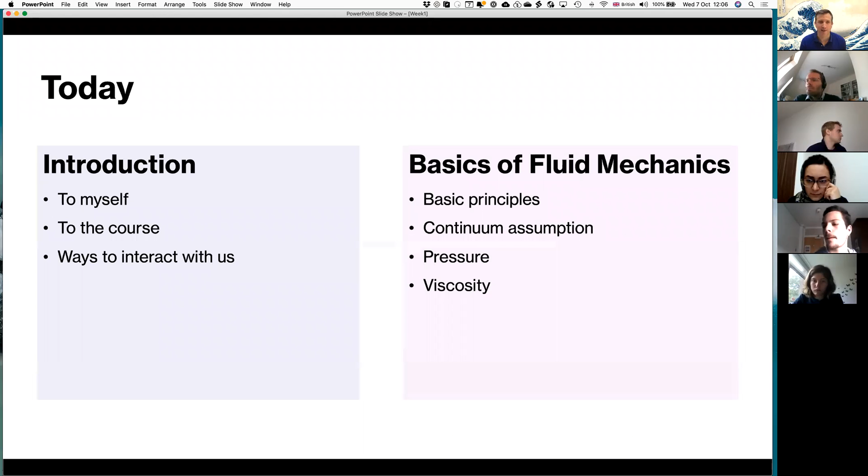Depending on how we're going, we might have a short break, or there'll be a short exercise for you to do, where we'll start to discuss some of the ideas behind the basics of fluid mechanics, in particular the continuum assumption, and introduce some of the main thermodynamic quantities of interest. Then I'll set you off with a couple of questions before Friday's session.

Right, so with the introduction - my research. Believe it or not, I was a student in Manchester a long time ago. I did the aerospace course, and I think I started with a very strong interest in aerospace, but it was more a technical interest. As the course developed, I realized that my interest lay in fluid mechanics rather than any one particular technology.

That's because fluid mechanics is such a powerful topic that it covers so many things in our everyday life. After I did my studies, I realized that my main interest was in this area, and I explored the possibility to investigate other applications. The thing I really love about fluid mechanics is that with one set of equations, with one understanding, we can contribute to so many different areas of science and technology.

I started in aircraft, did a number of research projects looking at trying to reduce the drag of, in particular, commercial transport. But then I moved to automotive and did some projects with Jaguar Land Rover, and also some motorsports projects, where the challenge was very similar - you're looking to understand the aerodynamics around complex shapes. The speed's a little different, but the equations more or less were the same.

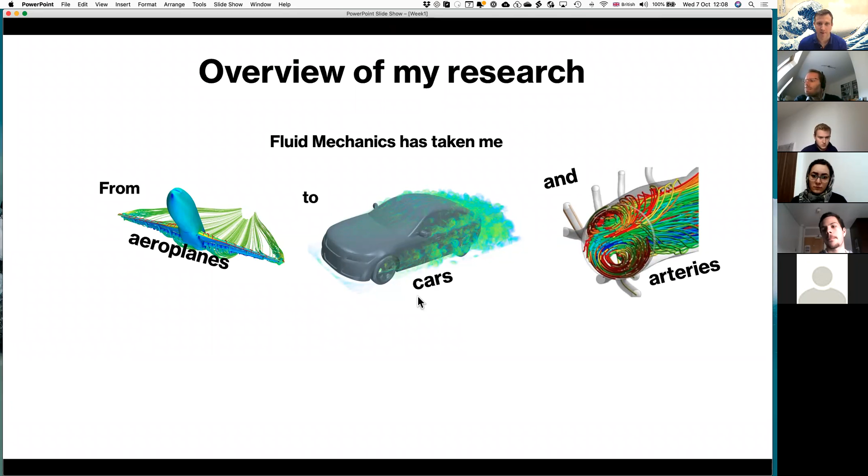I think the other thing that's really great about fluid mechanics is that because it's involved in so much of the outside world, it's just there in industry. Throughout my work, I've been involved in a lot of projects with industry, ranging from energy to tech sectors, as well as aerospace and automotive. It's been a great experience in terms of how versatile the equations are. I'll talk a little more about some of these things.

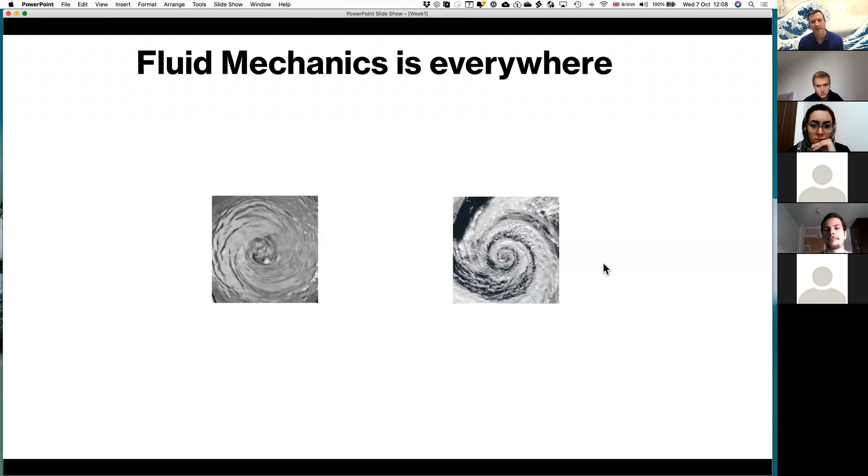Fluid mechanics is everywhere, and to convince you, I've got two pictures here - this is really the idea behind what we're going to drive at in this module. Once you understand the main equations, you can see patterns and shapes that are essentially reproduced all the way throughout our world. In this example, you've got a vortex system which is essentially identical regardless of the scale.

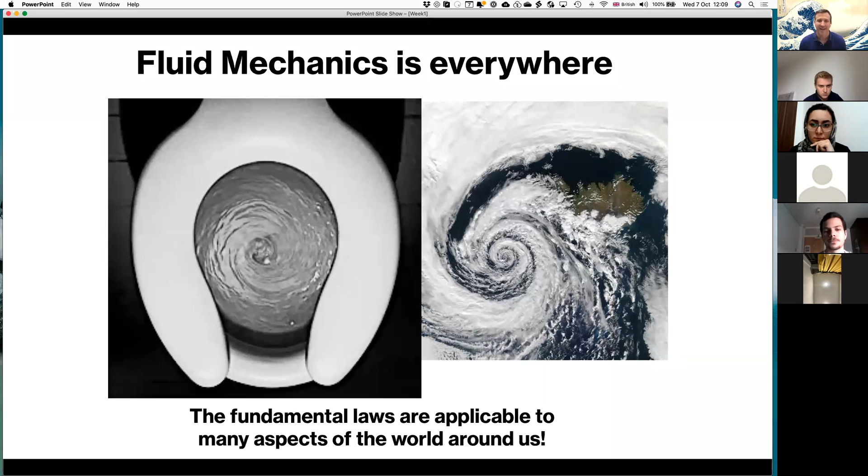We're going to start introducing some of the concepts behind the fundamental laws, which allow you to non-dimensionalize the observations and understandings, so that you can study the flow in a toilet, in a weather system, and understand them directly using the same concepts.

Fluid mechanics is indeed everywhere, but I think what really brought me into it was turbulence. This is a video that I find fascinating. I'm sure you've all heard of turbulence, but you probably haven't all really appreciated the intricacy and detail that's happening in a turbulent flow. This video is a high performance computer simulation of exactly what's going on in a turbulent boundary layer.

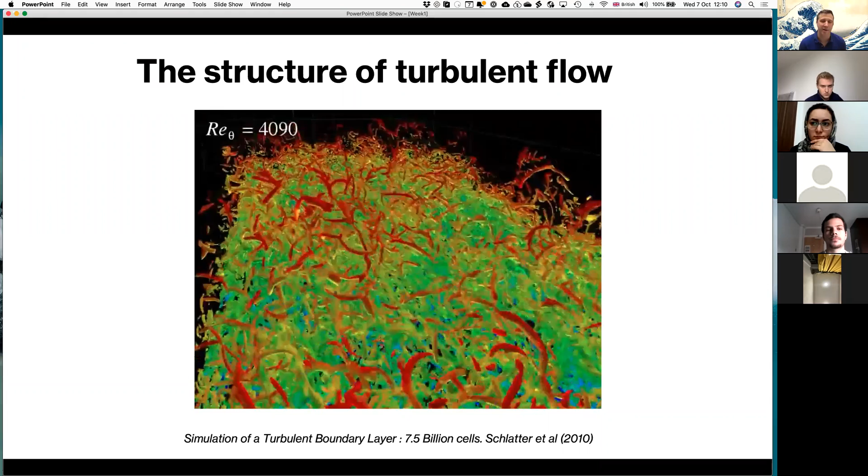At the time it was published, it was amongst the most detailed, most ambitious simulations ever attempted. As you go into the video, you see the flow become more chaotic as you go further down the boundary layer. The flow becomes more turbulent, and the boundary layer becomes thicker. What's really striking is the intricate detail of the structure of the turbulence.

This was run on one of the largest supercomputers in the world. It took up the entire facility for several weeks, and was seen as a fundamental science investigation to really understand in detail a turbulent boundary layer. But to put it into context, this incredible, amazing feat of computational fluid dynamics, as it's known, in a practical world is quite limited.

So really the beauty of fluid mechanics, from my point of view, is the intricacy and the multi-scale that it operates on.

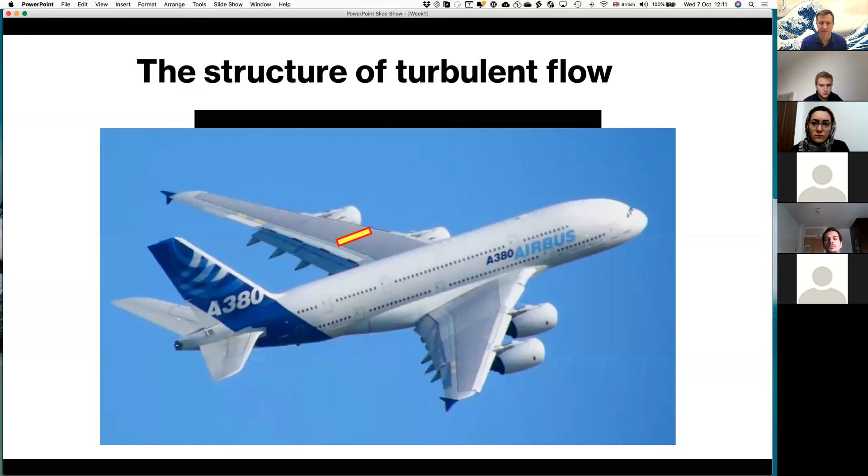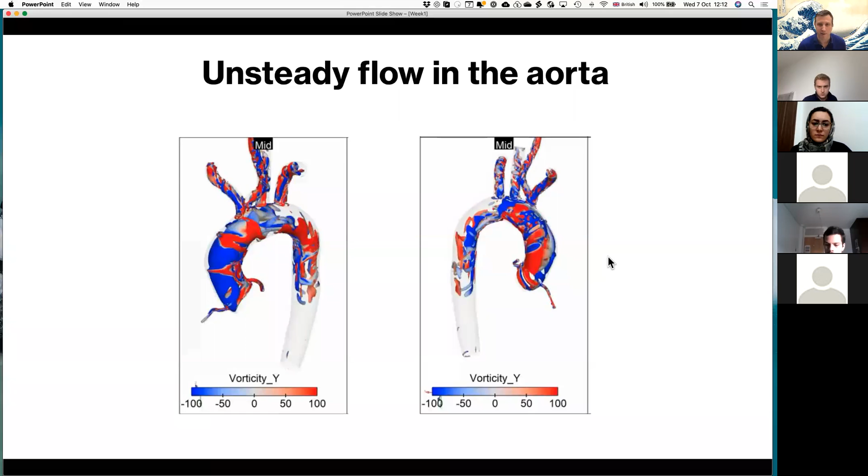And it's not just something limited to high Reynolds number. It's all around us, and potentially because it's invisible most of the time, we don't fully appreciate what's happening.

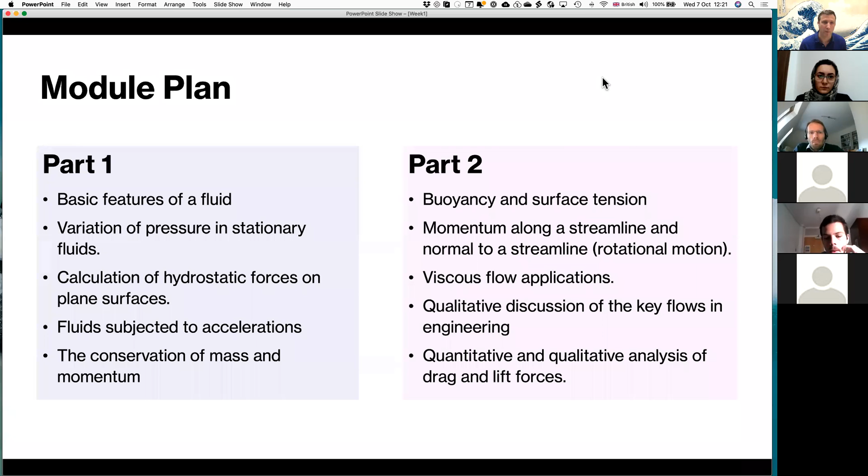So I'll finish part one by talking about the conservation of mass and momentum, two of the principal building blocks of how we use fluid mechanics. Then Professor Rogers will start part two, picking up on some of the things I've started, beginning with some of his personal interests and research in buoyancy and surface tension, then building on the application of the momentum equations and various strong approximations used to make them practical for a range of complex applications.

Broadly, from a synopsis of the unit specification, there are four aims of the course. The first is to make sure you understand how important fluid mechanics is - our goal is to pass on some enthusiasm for its significance and relevance to engineering. We also want to introduce, or solidify, your understanding of what a continuum mechanics approach is and how it differs from other methods.

We'll start to put all of the concepts together in a way you potentially haven't seen before. Many of you will have come across equations like the Bernoulli equation, and we'll probably introduce the Navier-Stokes equations, but perhaps not seen how they connect together. This is really what we're driving at - to show it's not a collection of disparate theories and laws, but that they're all connected, and with a proper understanding of how to go from one assumption to another, you can really leverage the power of fluid mechanics.

And so, introducing the main equations as well.

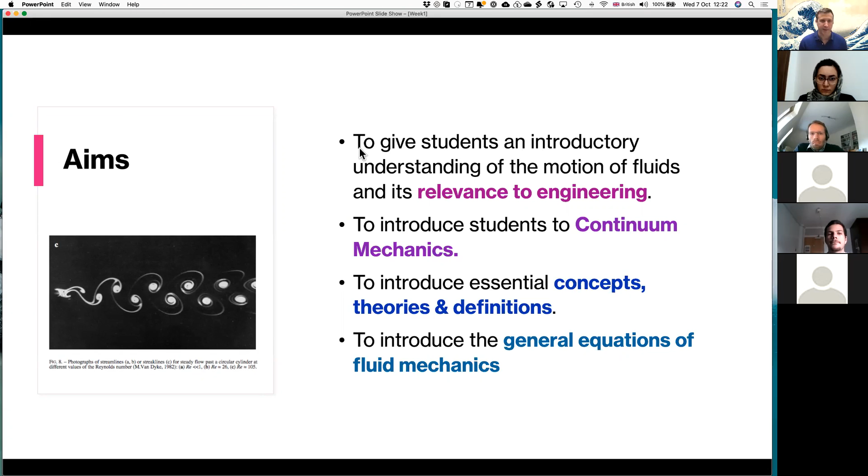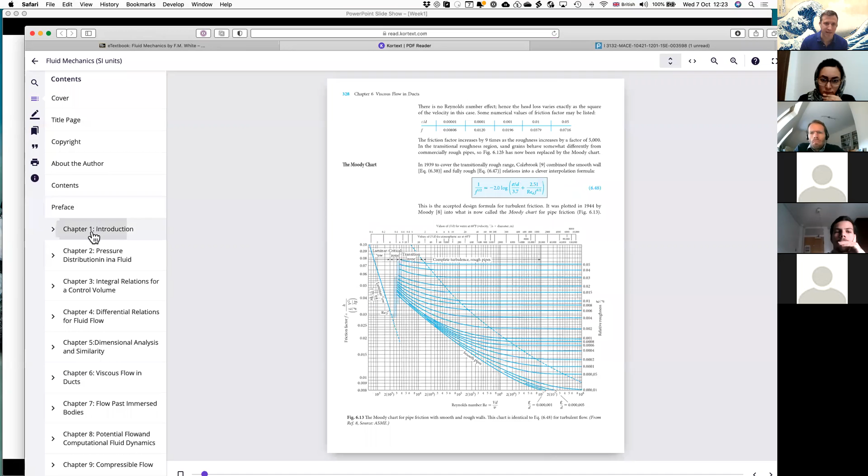This is the book we're using, available on Blackboard. I've got Blackboard loaded up here so you can all go to the page and access it via the Kortext website, which is a nice way to access an ebook - you can add annotations and notes that will stay with you throughout your degree, and quickly jump to chapters and navigate the book. As I go through, I'll give you some pre-reading each week.

We'll ask that you familiarize yourselves with those sections. Some of these will vary in complexity - this week there's quite a lot of pre-reading, but most of it is at an introductory level, and I'm sure you'll be familiar with some of it. As we go through, the amount of pre-reading will vary, and sometimes there'll be videos as well to help you understand some of the concepts.

In general, we won't go much beyond chapters 1 to 3. Someone already asked if you have to read the whole book - you won't need to for this course, though of course you can if you want. Our module content will focus on the first three chapters.

In terms of assessment, I've gone through that already. There's the quiz - I wanted to show it to you. Each week you'll have a chance to do a quiz, which is just basic multiple choice, with around 20 questions each time. You'll be able to answer the questions and get feedback on why your answers are correct or not. It's asking me to answer all of them now, so I won't do that.

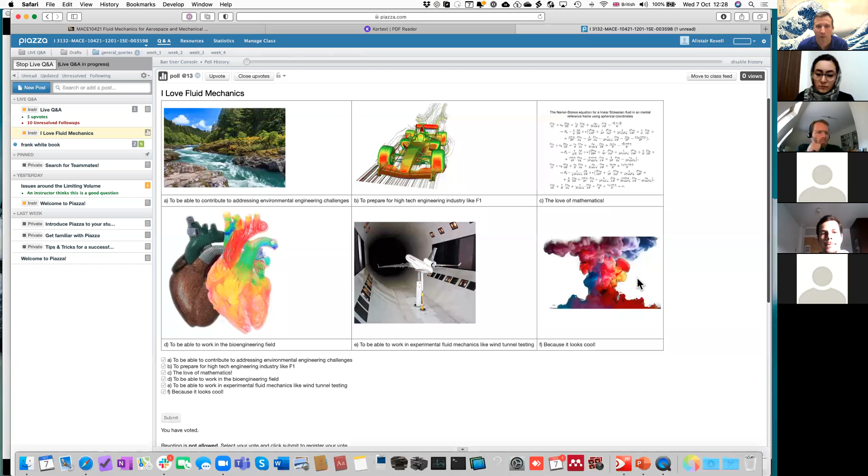And this one, I love fluid mechanics - why do I love it? Well, there's all sorts of reasons, and I've read them all through, and I'm not embarrassed to admit it's all of those reasons. We have some emerging answers: to prepare for high-tech engineering industries like Formula 1, that's interesting to hear. But also the environmental challenge as well, that's cool. And because it looks cool, right - that, to be honest, is a big factor for me. I really like the artistic side of it. Something that isn't picking up as much interest as I thought is D, the bioengineering. I'm actually surprised the love of mathematics is doing better than bioengineering. Okay, fair enough, that's some budding mathematicians with us. Okay, I'll leave that there.

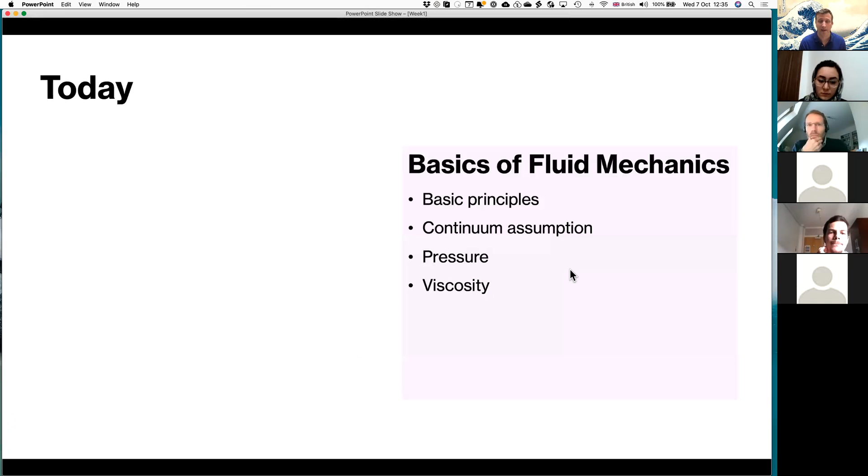I think everyone should have come back by now. So we're going to very quickly start with some of the main concepts of fluid mechanics, just to introduce you and pick out some of the important ones. Just to emphasize, we do rely on you to look at the content. There's quite a lot in this first week, there'll be less in future weeks. If you have any questions about it, just let us know.

As you will no doubt have seen, because this appears probably on the 3rd page, we are starting to classify fluids and solids and liquids as things that are essentially differentiated by their resistance to a force. That seems fairly straightforward. If you apply a force to a solid, it can resist it with a static deflection. In contrast, if you apply a force to a fluid, it will continuously move, and the only way it can resist this force is if you provide it with some external pressure, some kind of walls around the side. Without that, it will continuously fail, continuously move around and deform under the application of a force.

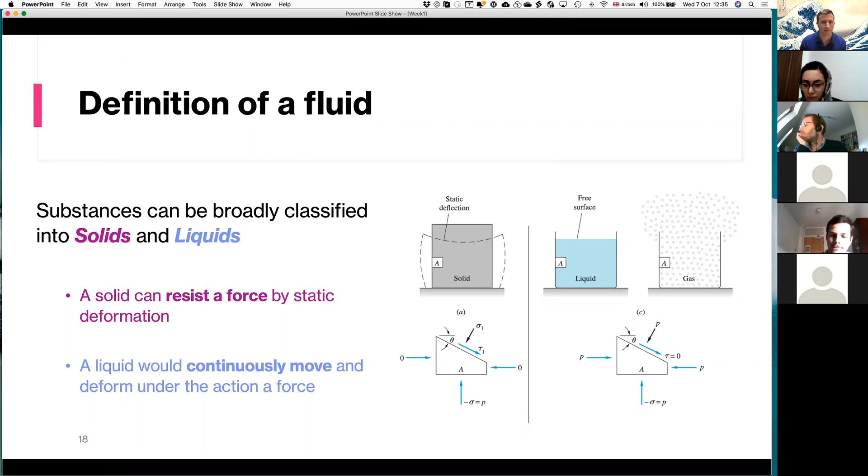And to demonstrate this, let's start a discussion on Piazza as to what is going on here. I'm just going to see if I can do this - new post... water, not water.

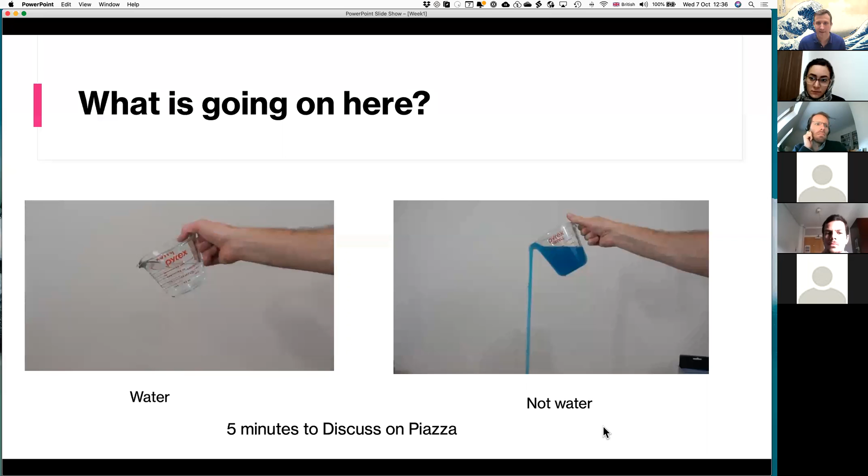Okay, so what is going on here? I'm going to play the video, and I'll give you a few minutes to put some comments into the box to see if you can explain this video I'm going to show you now. So you've got here a jug with some water in it, and here a jug which is not water. If you look closely, having just said it's fairly easy to define a fluid, something very strange is happening in the one on the right. The jug of water comes out in a very predictable way when you pour it, the jug of not water doesn't.

I'll leave that with you and let's see what people are starting to come up with for answers here. Laminar flow - well, they're both at low velocity, so it's not necessarily to do with laminar flow, they're probably both flowing in a laminar way. It's a polymer, this is interesting - so what is it about it being a polymer? High viscosity, yeah that's true. High surface tension in the not-water. I'm not going to tell you exactly what the substance is, I'll post that later, but it's definitely not water.

Just a little bit comes over the edge, and suddenly, bang, it all comes out. Weird.

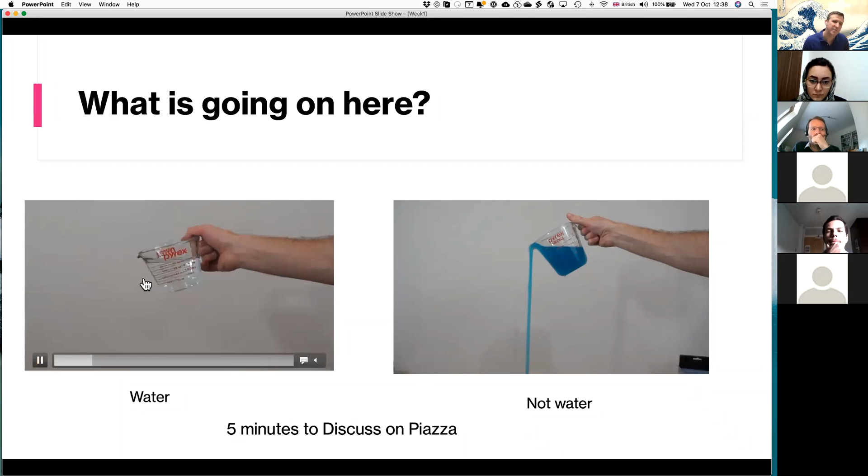Long chain molecule, that's it, well done. So essentially, it's a long chain molecule polymer. What's happening at a molecular level, as a little bit of the flow goes over the edge here, it's able to pull the rest of the fluid due to the fact that there are long chain polymers connected to the rest of the mass of the fluid. In contrast, the water molecules are small enough that they're able to essentially act in isolation from the rest of the fluid. This perspective is really important as we start to consider a fluid as a continuum. A fluid at a molecular level is nothing more than a group of particles that have a position and a velocity.

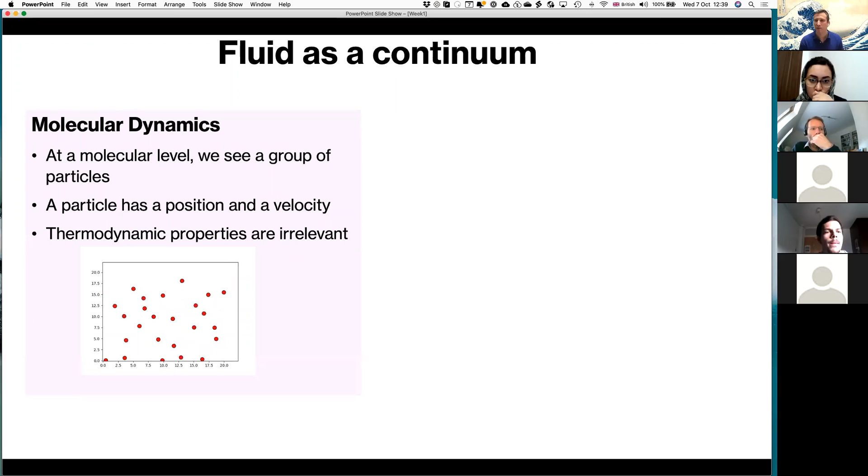Thermodynamic properties like pressure or temperature actually have very little significance to an individual molecule. More about that later, when you can start to think about what actually a pressure or a temperature is at a molecular level. In contrast, continuum mechanics is the study of the bulk motion of particles rather than the individual. We use and apply equations relevant to continuum mechanics in order to apply at macro scale.

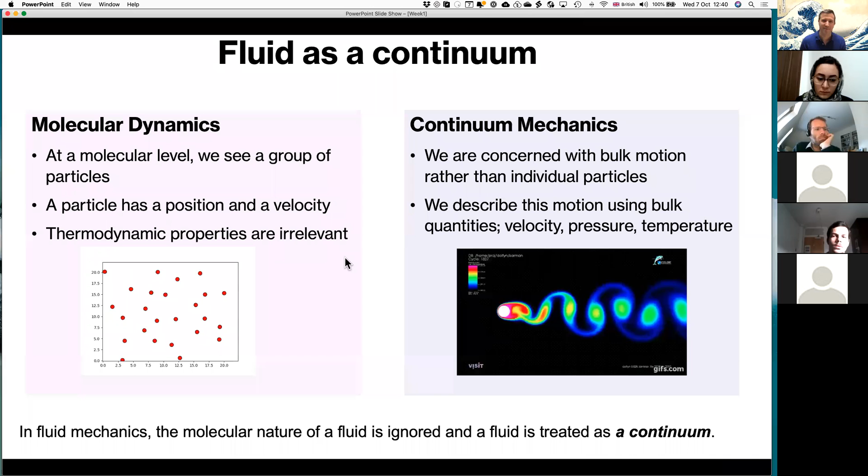So things that are happening at a practical scale, far, far greater in dimension than molecular dimensions. In fluid mechanics, we essentially ignore the molecular nature of fluid most of the time, although I just showed you a counterexample with the long chain polymer. So we always have to be a bit careful.

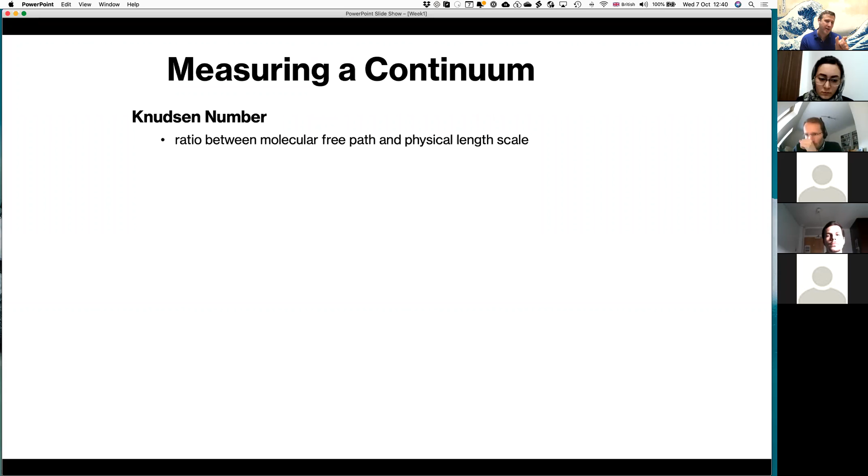In terms of how we measure a continuum, there's a very useful non-dimensional number called the Knudsen number, which is essentially the ratio between how closely spaced the molecules are and the length scale of the practical application. Looking at this example, the Knudsen number is the ratio of the mean free path, the average distance between molecules, and d, which depends on the application, but is essentially the length scale of where the flow is going through. In this case, it's the dimension of a gap between two walls.

At the continuum range, where there are many, many molecules all packed together tightly, the flow acts as a continuum. It passes through this as you would expect in a flow. But at the high Knudsen number range, above 1, you're essentially saying that the mean free path, the distance molecules travel before colliding with each other, is essentially the same as the physical length scale of the domain. Above 10, you get all sorts of different non-continuum behavior, and you're in the molecular regime. This is very important in some practical applications.

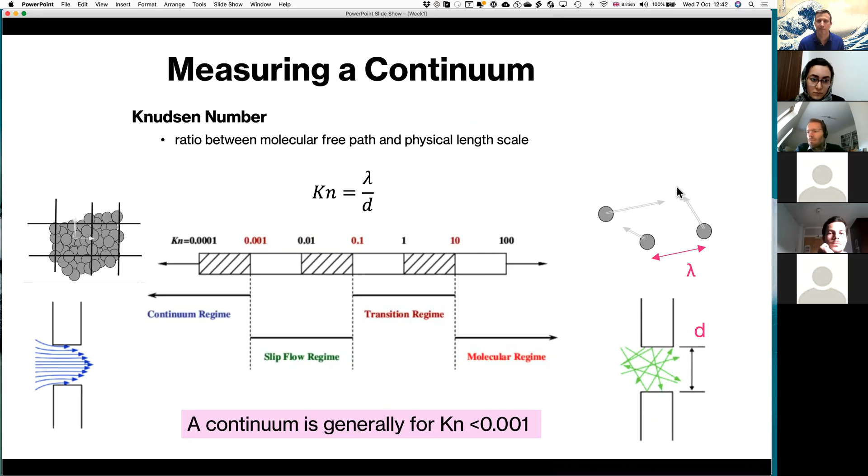As you approach a vacuum, as in space, you essentially have high Knudsen numbers. But for the vast majority of engineering flows and practical flows of engineering relevance, like water and air, that we're going to be studying, you're really considering very small Knudsen numbers, where essentially there isn't a gap, or we're not interested in a gap between the molecules. Almost all flows of practical interest are below this Knudsen number range of 0.001. So it's really small, a ratio of 1 to 1,000, the mean free path to the practical length scale. So the Knudsen number is a key concept.

Continuum. Another concept that is really fundamental that I wanted to start with is viscosity. Viscosity is close to my heart because it's the root of all turbulence and the cause of all interesting things as far as I'm concerned. It's essentially a measure of the stickiness, how sticky a flow is. But it's more than that. If you think at the level of the layers of the fluid, it's resistance to motion between the different layers. All fluids have viscosity of some order, except in the theoretical sense.

We do consider flows that are ideal fluids, and in such flows there are no losses due to viscous forces. There is no viscosity, but this is an assumption only. In practical circumstances, there is always a loss, as you will find out in thermodynamics.

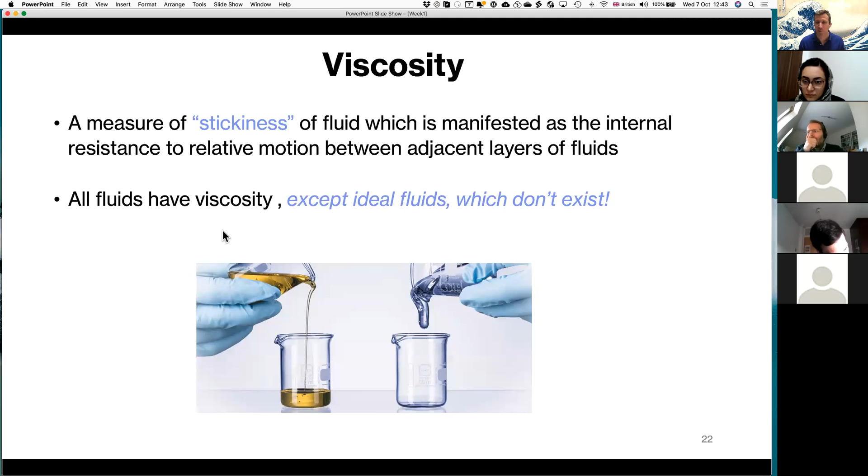Viscosity becomes really important close to a wall, because if you have a stationary wall, that wall at the molecular level is pulling and stopping the molecules in the flow from passing, and they come to a complete rest. Translating that to a macro scale level, flow and layers or pockets of flow come to a stop at the wall. Their velocity comes to a complete stop. It sticks to the surface. And we call this the no-slip condition, which is a fundamental condition of fluid mechanics.

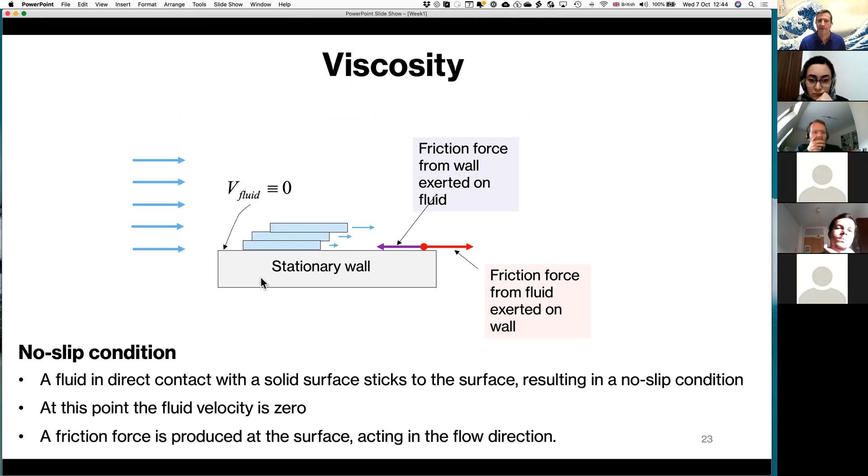You'll see this no-slip condition given in textbooks, in coursework answers all over. The velocity at the wall is 0. And that's because of viscosity. The flow is essentially brought to a complete standstill because of the viscosity between the layers.